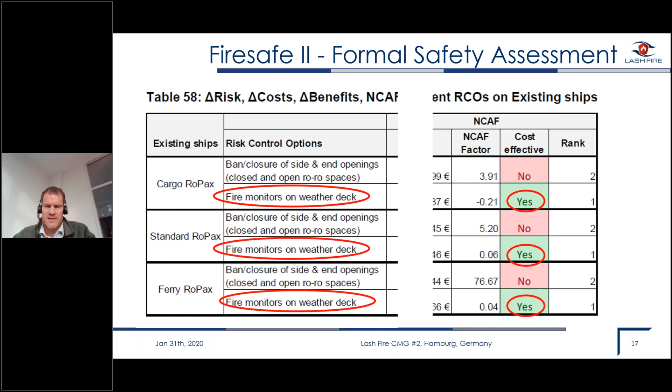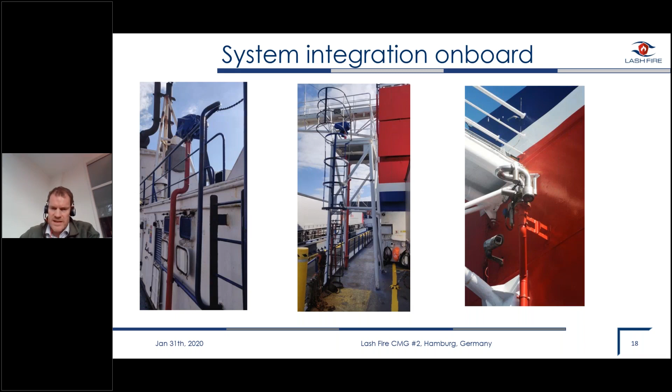We could also go for the remotely operated monitors, where there is more freedom to put them on existing structures where there is no operational manual access needed. Other considerations that need to be done is to look at the coverage, and there will be, let's say, formulas on how to calculate this coming as well to our support. I think John later on will tell more about what is coming in terms of rules here.

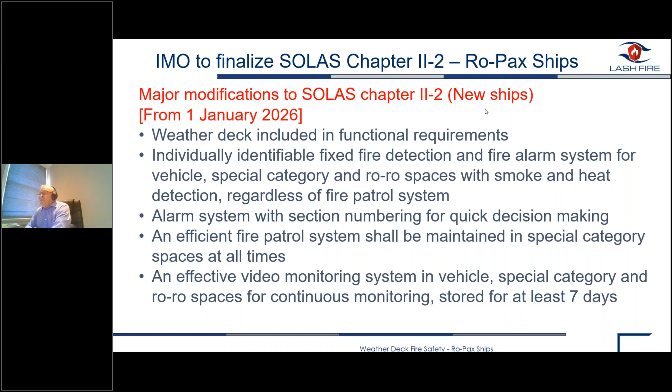So first we look at the major modifications for new ships, which in square brackets is proposed to come in from 1st of January 2026. So there are weather deck. The weather deck will be included in functional requirements for new ships. There will be individually identifiable fixed fire detection and fire alarm systems for ro-ro spaces, and fire patrol system in special category spaces at all times.

There will also be a video monitoring system in vehicle, special category and ro-ro spaces, with continuous monitoring to be stored for 7 days.

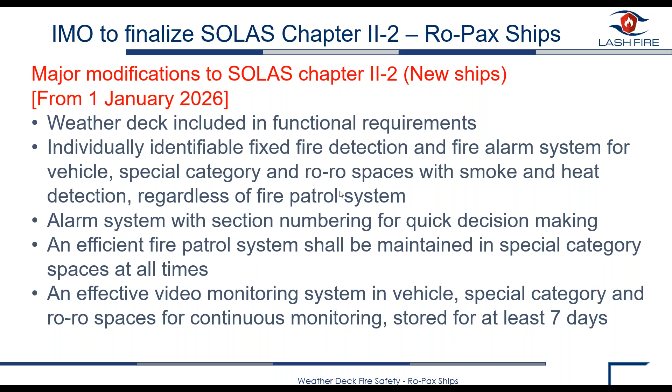John, we seem to have some technical issues with your presentation. Yes, that looks good now. Yes, I'm sorry. I think we are good now. So that was the first slide. I'll just move to the second slide. Is that okay, Johan? You can see the second slide? That's okay. Please carry on.

Good, thank you. So again, this still relates to new ships, planned to come in from 1st of January 2026, with additional structural fire protection for special category spaces, if subdivided with internal decks, the mezzanine decks. Arrangements for openings in ro-ro and special category spaces were a point of great discussion. Those openings will be permitted if protected by a closing device, but they're not to be permitted under survival craft, emergency generator, and air intakes from the engine rooms.

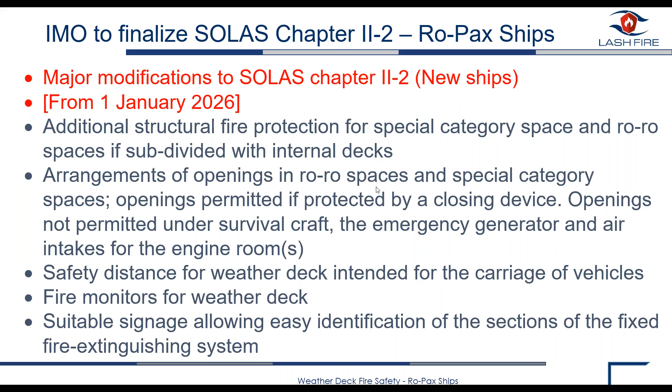There has been planning to work out a safety distance for weather decks intended for the carriage of vehicles, and fire monitors will be required for new ships on the weather deck, and suitable signage to give easy identification of the sections of the fixed fire extinguishing system will be required.

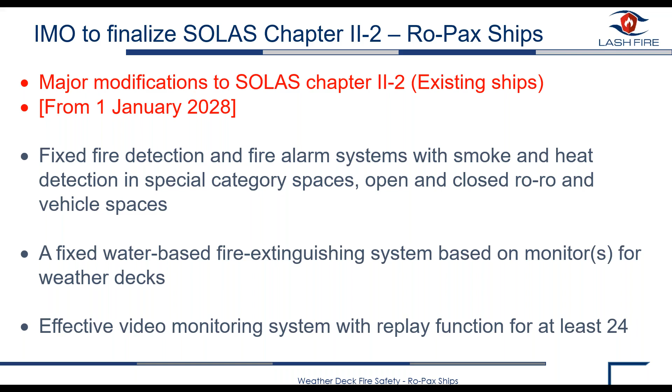If we now move to existing ships, the requirements are much less, and the plan here is, in square brackets, to implement from 1st of January 2028. And the things which will or are very likely to go forward are, again, the fixed fire detection and fire alarm systems with smoke and heat detection in special category, open and closed RoRo spaces and vehicle spaces, fixed fire monitors on the weather deck, and an effective video monitoring system, but with a replay function for at least 24 hours. Some ships may already have that installed, but only for a limited period. So it was agreed that would be for 24 hours on existing ships.

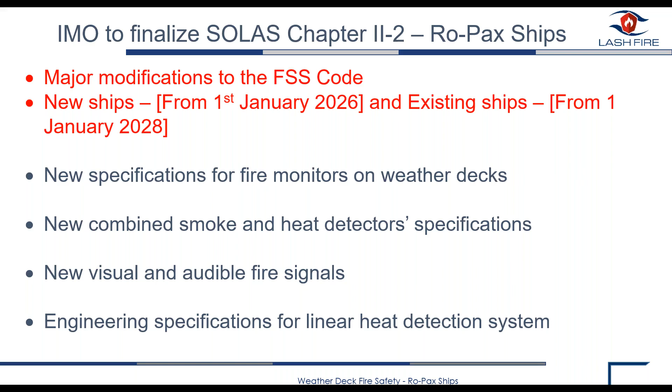There are consequential amendments to the FSS Code. For new ships, those amendments would be from 1st of January 2026, and existing ships from 1st of January 2028. So the dates are aligned. And the items here are specifications for fire monitors on weather decks, new combined smoke and heat detector specifications, new visual and audible fire signals, and engineering specifications for linear heat detection systems. And that concludes a summary of the upcoming IMO rule development.

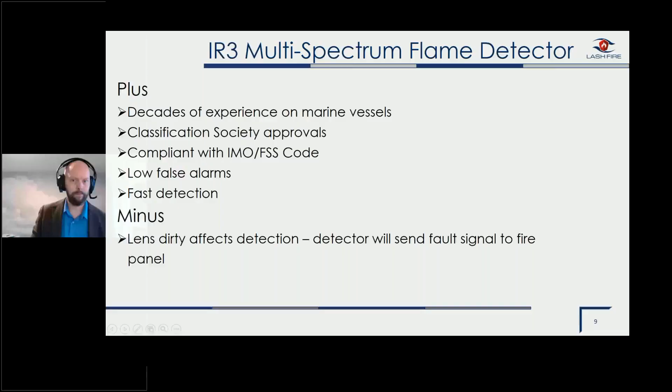Very good, Johan. Thank you so much for that. Now we have framed the issue and we have talked about the developments. So let's move into the solution side of things. Rick, East Coast, North America somewhere. Good morning. Houston. Let's hand over to you. Thank you, Johan. Rick Jeffress with Fike Corporation. You see my screen okay? Yes, we can see your screen, but we cannot see you, Rick. Okay, should be able to see me now. Excellent, thank you. All right, thank you.

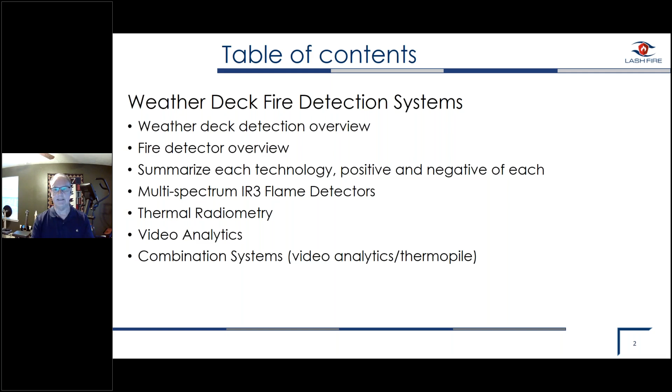So I'm Rick Jeffress. I'm with Fike Corporation. I handle business development for flame detectors, video analytics, and thermal radiometry. We'll be talking about these detection products on shipboard applications. So what we'll be talking about today is the weather deck detection overview. We'll talk about each type of technology. We'll provide the negatives and the positives of each technology. The technologies that we'll be discussing today are multi-spectrum triple IR flame detectors, thermal cameras, which are thermal radiometry, video analytics, and combination systems including video analytics and a thermopile element.

So the issues that we run into on weather decks are a large space. The detectors are required to cover a large area to reduce the amount of detectors required on the vessel. We also have the environment: rain, snow, water, ice. All the detectors are required to be able to withstand these elements, not corrode, continue to work. And if they do have an obstruction on the lens that alleviates their ability to detect, they need to be able to send a trouble signal to the fire alarm system so the crew can clean the detector.

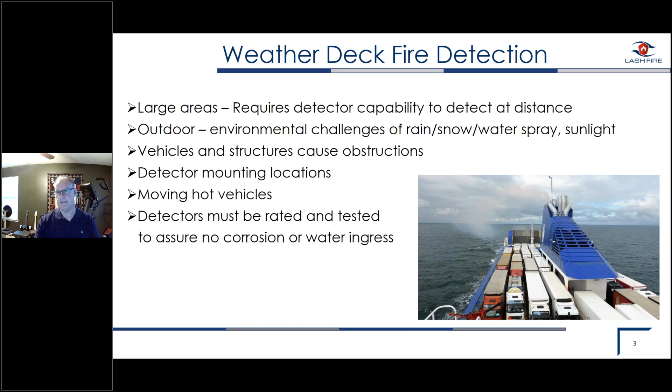We have vehicle obstructions. So as you can see in this image, any fire that occurs between the vehicles may not be detected by the detector. So we want to make sure the detectors are placed in such a manner that they have visibility to as much of the deck space between the vehicles as possible. So they should be mounted high. Moving hot vehicles, this is particularly troublesome for thermal radiometry. So that's an issue that we need to deal with. And the detectors need to be rugged and be able to withstand the environment without corrosion or water ingress.

All of the detectors that we tested have the ability to detect a 0.33 meter fire at 33 meters. So this is the requirement of EN 54, FM Global, and classification societies. And this is the standard of a 0.33 meter heptane fire at 33 meters. All the detectors that we tested have optional video cameras, and the cameras have the capability of ONVIF-S, which is a global communication standard for IP video cameras, so they can integrate with the existing NVR.

Only the triple IR flame detector technology has standards approved by class and included in the FSS Code. The IR3 flame detectors and the thermal radiometry cameras have technology that can integrate with water cannons for automatic operation, to point the water cannon at the fire when a fire is detected and flow the water. Cost differences between the technologies: thermal radiometry, due to the imager, has the highest cost. The combination video analytics thermopile is next lower. Then we have triple IR multispectrum flame detectors, and then video analytics.

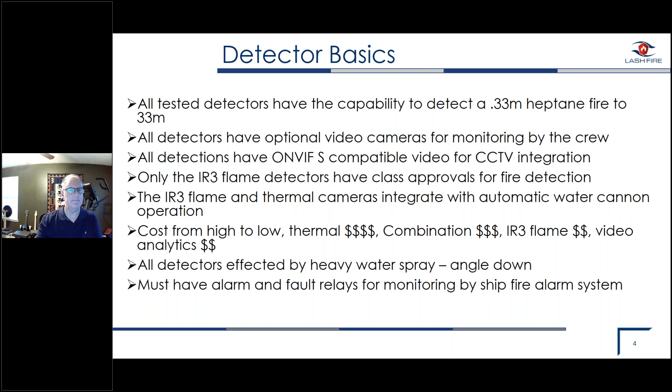All detectors will be affected by water spray, so we recommend that the detectors be angled downward to avoid buildup of water on the lenses. And each detector must have alarm and fault relays on board to make sure that they can be connected to the fire alarm system. So, as far as coverage is concerned, each blue quarter circle represents a detector's coverage. So that would be a detector located above the vehicles as high as we can get them, so we can look down between the vehicles with a 33 meter coverage. It's recommended to have some overlap, so areas that might not be covered by one detector are covered by another one. The coverage is three-dimensional, so you normally have a 90-degree horizontal and a 75-degree vertical field of view.

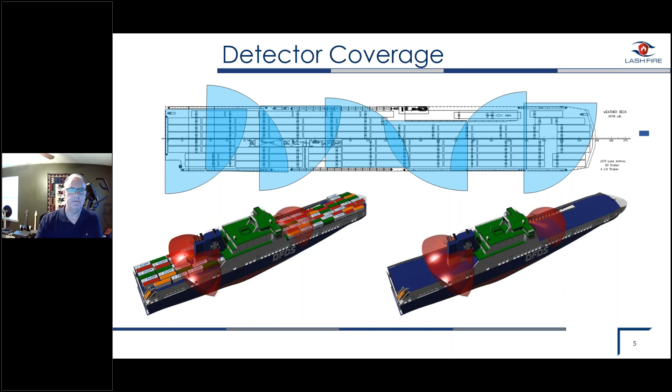The setup that we have now on the aft deck of a RoRo ship: we have the detectors mounted, monitoring the aft deck, monitoring the ship's operations to assure that we don't have false alarms, monitoring the detectors for false alarms, and then we have run some testing. We've got some more testing coming up for the detectors.

So triple IR multi-spectrum flame detectors have been used in the marine market, oil and gas market for years. They do comply with the FSS code. All classification societies have multi-spectrum infrared standards and approvals. EN54 has standards, FM Global in the US as well. So these are widely used on refineries near the ocean, on offshore oil and gas platforms, FPSOs.

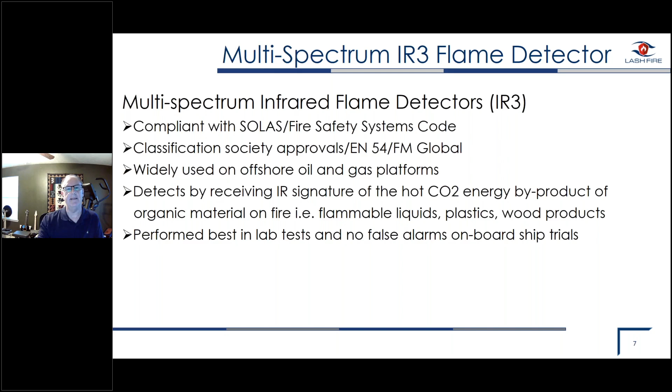So the way that triple IR flame detectors work, they're monitoring for the IR signature from hot CO2 that is a byproduct of an organic fueled flame. This technology was the fastest to detect in the lab tests. So the way that the system works, as you can see in the top image, the top is a Fike, the bottom is a Tycho.

They work very similar in the fact that they are monitoring for the 4.5 micron spectrum. There are 3 ports. The 4 and the 5 microns are reference bands. If we see a high incidence of 4.5 and low of 4 and 5, then it is likely a flame. But if we see a high signature of all the frequencies, then it's likely noise. So that's basically how a triple IR flame detector works. There's more in the algorithms based on the manufacturer.

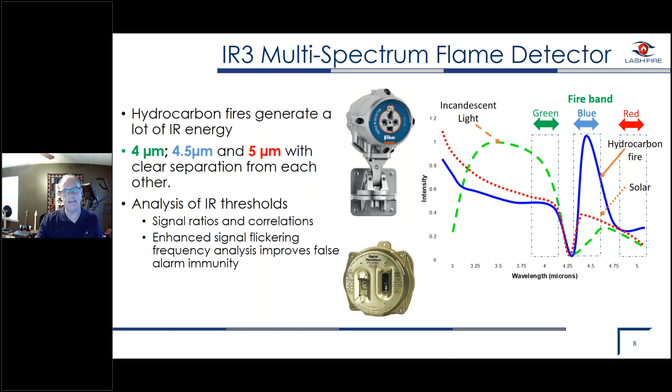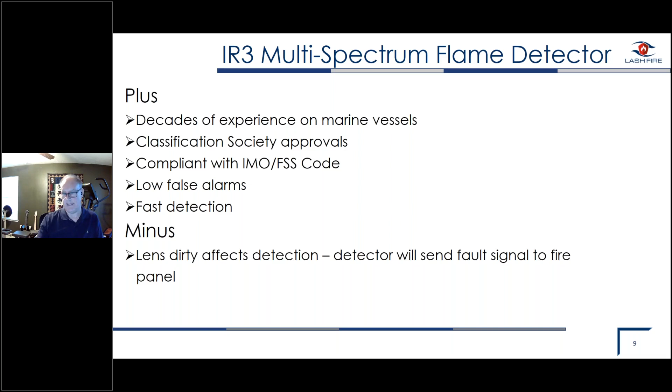So pluses of triple IR multi-spectrum flame detectors. They've been used for decades on marine vessels, primarily in the oil and gas industry. There are approvals in place. They're compliant with FSS. Low to no false alarms. There's no reason why this technology should have any false alarms in the environment. Very fast detection as well. Minus, as with any of the detectors, if the lens gets dirty, that would inhibit the detection. The detector should send a signal to the fire alarm panel if its lens is obstructed.

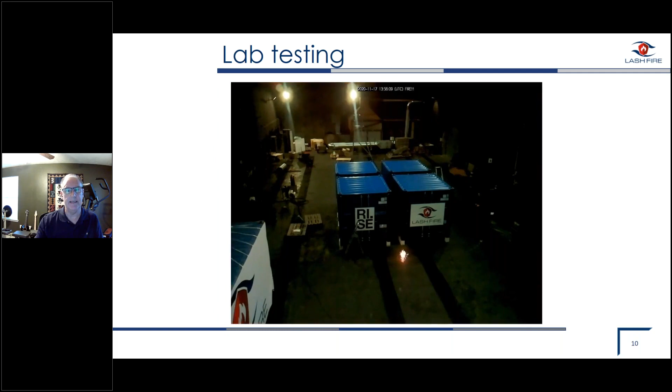This is a video from the lab fire. So you see the detector went into an alarm very quickly, and the flashing outline indicates an alarm situation. Same situation on the aft deck, a gentleman holding a stick with a rag on fire. Same flashing indicating the alarm.

So the thermal radiometry cameras monitor the outside surface of objects in the camera's field of view. They have been proven to detect at very great distances. A lot of potential for this technology to be used in the fire service, both on land and in the marine environment. There are few approval standards now, and this technology is just beginning to be used for the fire service, but we're seeing a lot of good results from the technology.

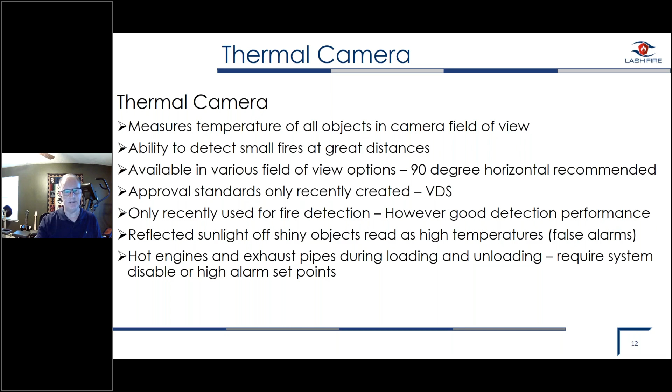One of the issues that we run into is when you're loading and unloading, the hot engines are picked up as a high temperature on the thermal cameras. So we must set the alarm threshold above the hot exhaust pipes, or turn off the detectors during loading and unloading. The way that the technology works, we're monitoring a lower frequency than the triple IR. The energy is received on an imager and then processed for alarms, and video is displayed.

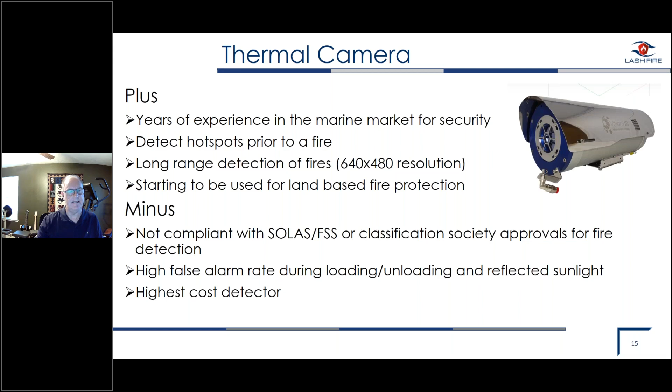So this technology has been used for years for security, monitoring for people, for vessels, on board ships. It will detect a hotspot prior to a flame, which a triple IR flame detector or a video analytics camera requires. Has long range capabilities, and we're starting to use it for fire detection. No FSS or other standards for this type. We do see some high false alarm rate during loading and unloading, so some tweaking of the technology needs to take place, and this is the highest cost detector.

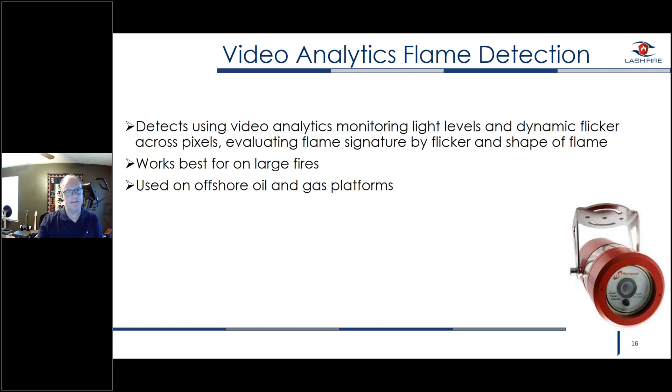Video analytics is monitoring light levels. Sometimes some technologies use color. We're looking for dynamic flicker and the movement of the flame, the shape of the flame. So this works best on large fires, especially at greater distances. And the detector needs to see most of the fire so we can see the flicker and the moving object. It is being used on oil and gas platforms currently. A video from our lab tests, the video analytics will indicate the area of the flame with a red box.

So pluses: the technology has been used in the marine market on oil and gas facilities outdoors and has proven to have a low false alarm rate. Minus: no EN 54 standards or other marine approved standards for this technology. FM Global in the US does have a standard for video analytics.

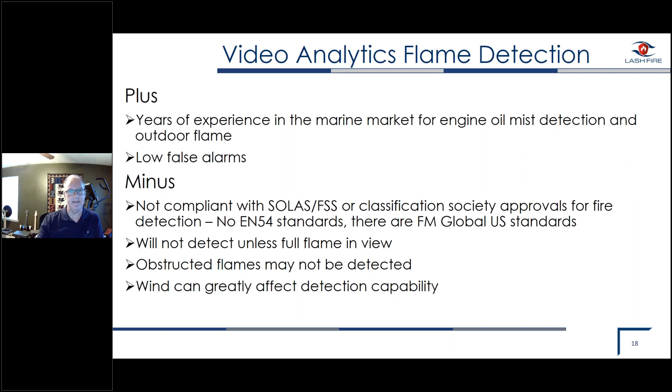Need to have the full flame in the detector's field of view. Obstructed flames likely will not be detected. You have to see the full flame. And wind can affect the flame and how it's perceived by the technology.

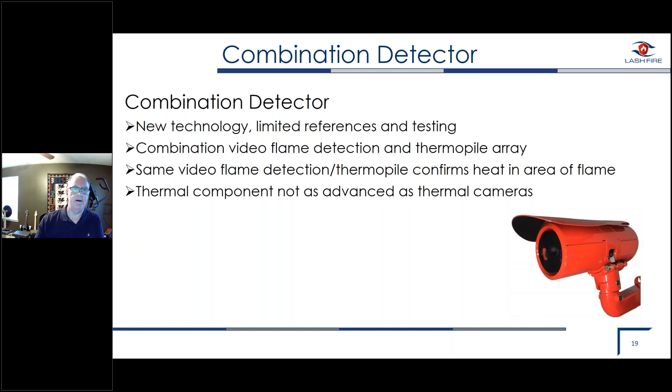The combination detector is video analytics with a thermopile. It's not as advanced thermal radiometry as a thermal camera, but it will tell you if there is heat in the area of the detection. So we're combining: if the video analytics sees a flame and it's confirmed by heat in that area, then an alarm is generated. There are no standards for this technology.

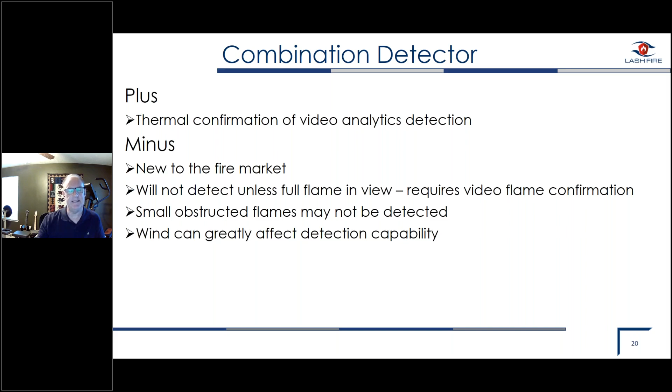This is new to the market. It shows promise. We're doing some testing. It has detected. We have seen some false alarms with it. But with video analytics, the wind can have an effect, and small flames will not be detected, where they likely would be detected by thermal cameras or the triple IR flame detectors.

So based on the testing on the ship so far, the thermal radiometry cameras have been challenged as we expected them to be due to the loading and unloading on the vessels. The combination as well, we are seeing some false alarms. Video analytics can be affected by sunlight, flicker with water on the deck, and then if there is some heat in the area, that can cause a false alarm. The triple IR flame detectors and the video analytics have had no false alarms to date. So thank you for your time.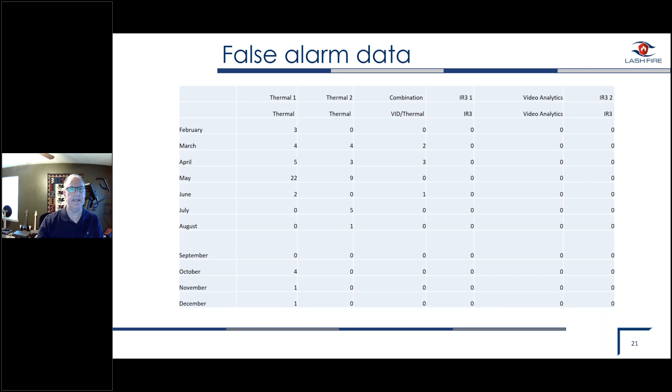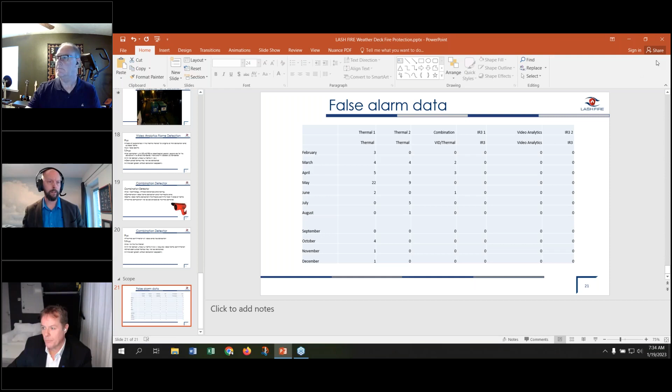Many thanks, Rick. I recall early days at the IMO when we had deliberations on these things, and there were a lot of concerns that the detection systems just weren't there. But I think the industry has caught up, and there seems to be quite a lot to choose from. Moving from detection, the final part of our general discussion here is on the suppression side. So Roger, how would you recommend we deal with this in case we have a fire on the weather deck?

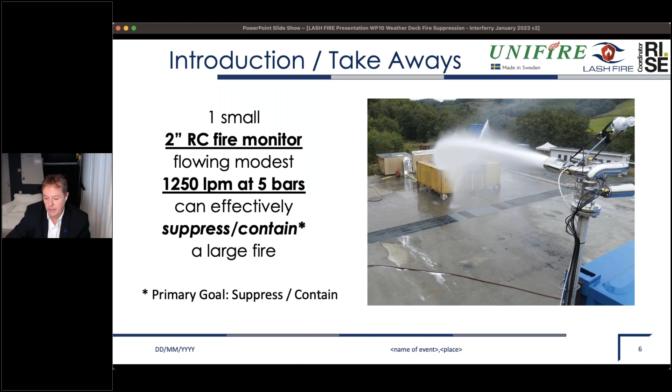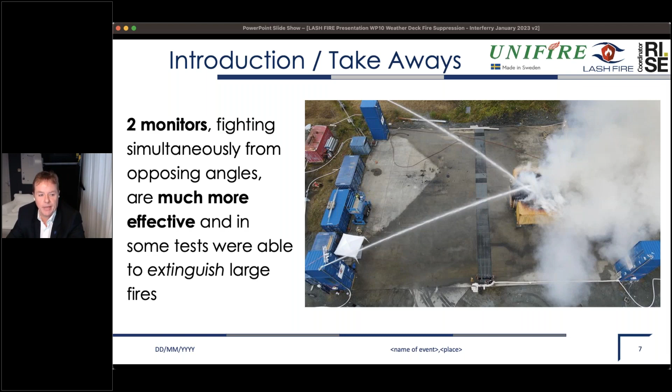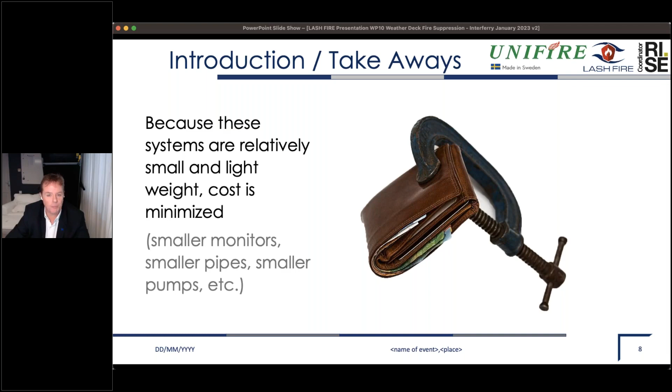Also, 2 fire monitors fighting simultaneously from opposing angles is much more effective, and in some tests we were even able to extinguish large fires. Next, because the systems are relatively small, using a 2-inch monitor at relatively low flows and pressures, we're able to reduce the costs. Smaller pipes are required, smaller pumps, and so on. So that keeps costs under control.

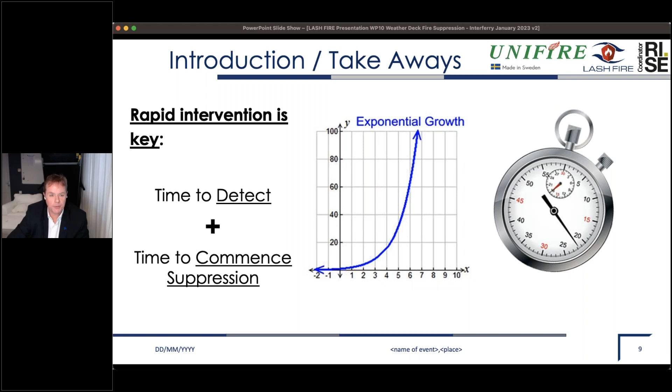Next, rapid intervention is really key. So we want to minimize the time to detect and then commence suppression as much as possible. Also, autonomous systems can very rapidly detect a fire, locate the fire, and suppress it with the fire monitors. This brings a big advantage to be able to react very quickly to a fire on the weather deck.

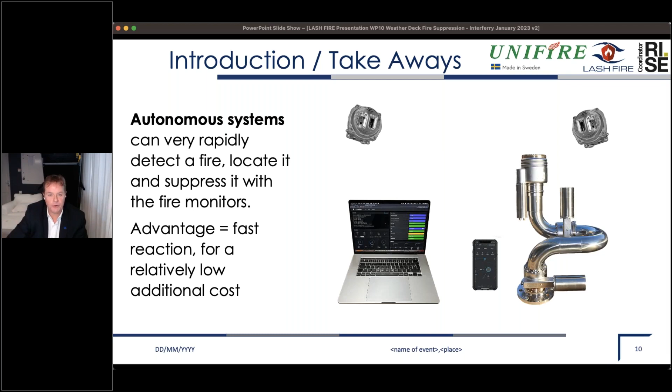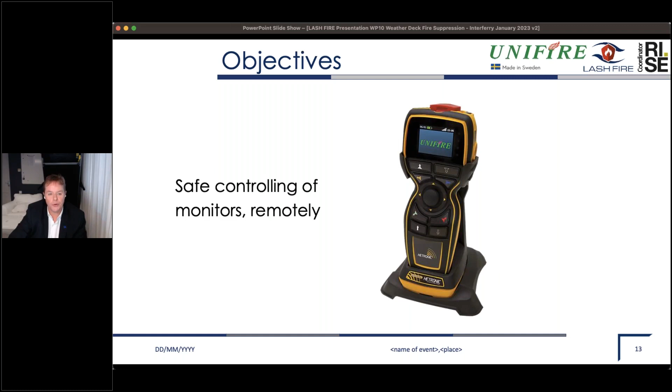So the objectives that we looked at were, first of all, quick system activation and suppression. Then also the safe controlling of the monitors by remote control. Next, high coverage of the deck. And then all of the equipment needs to be able to withstand the harsh environment. We also want to minimize cost to the maximum extent possible. And we also want to bring in state-of-the-art technologies to help with the problem.

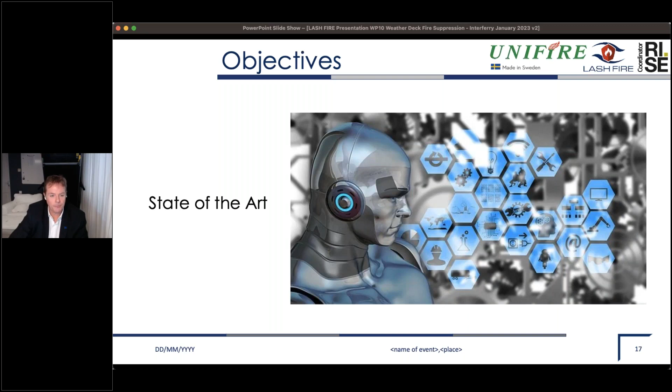So the solutions that we came to and developed and tested were fire monitors, so remote controlled, also looking at semi-autonomous and fully autonomous remote control systems. And then another partner developed a compressed air foam system, which unfortunately malfunctioned during the testing, so we don't have any conclusions from that. And for that reason, I won't talk about that in the rest of the presentation.

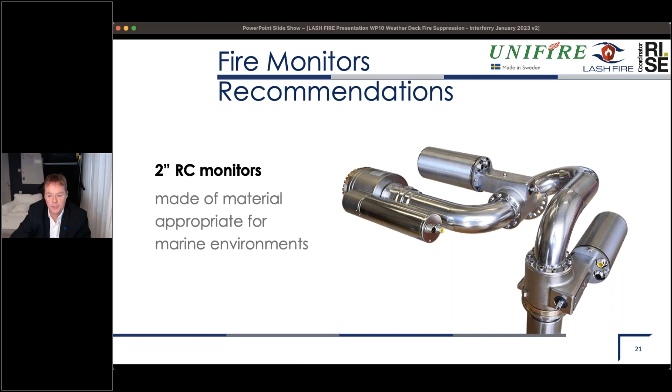So looking at the fire monitors, we are recommending 2-inch remote controlled monitors. They should be made, obviously, of a material that's appropriate for marine environments, such as stainless steel 316L or other equivalent. We are recommending a modest flow of 1,250 liters a minute at 5 bars of pressure. And again, that's to keep all of the system requirements down to a minimum while still being able to provide effective suppression.

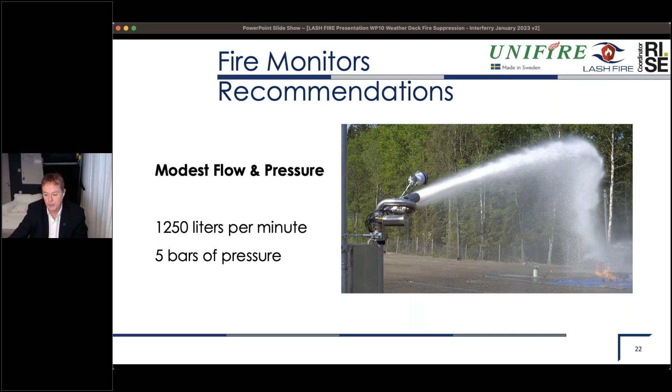Not the anticipated IMO language that was introduced at the beginning of the talk, but from our research and development, what we're recommending to the IMO through the LASH FIRE project is that the monitors all be able to be remote controlled. And there's a number of reasons for that. First of all, by having them remote controlled, you allow the maximum flexibility in terms of placement, to put them up high and in locations where they can adequately suppress a fire on the weather deck, especially given the very tight packing of the cargo.

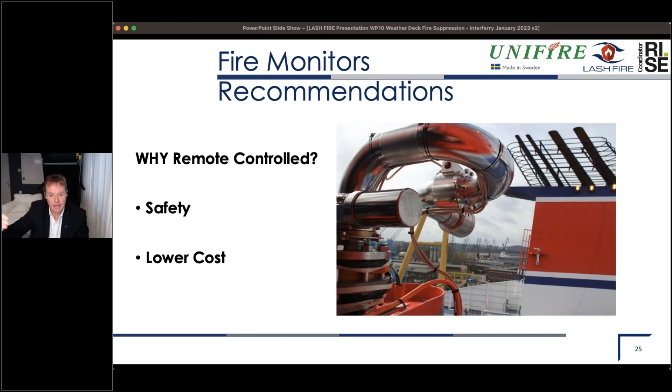Also, you can have a faster response. A human can pick up the remote control and immediately start suppressing, rather than having to get to a mechanically operated monitor, very often having to get dressed and get an air supply and so on, which dramatically reduces the response time. Also, from a safety perspective, you can keep a safe distance away from the fire and still be able to operate it. And by not requiring these structures to get up to a manually operated monitor, and for the other reasons, we're able to lower the overall cost.

So we're recommending that all systems be remote controlled, but we have also looked at and developed and allowed for semi-autonomous systems, which allow a human to start the system and record and play back a spray pattern while they continue on to other suppression activities or help with other emergencies. Also, fully autonomous systems that require no human intervention whatsoever, which can automatically and very quickly detect a fire and suppress it.

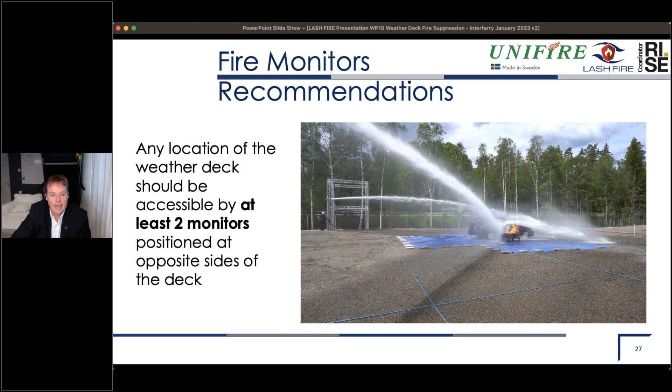We also are recommending that all locations of the deck be accessible by at least 2 monitors positioned at opposite sides of the deck, and that the fire pump be able to supply at least 2 monitors simultaneously. Also, the monitors should be placed high up in order to give them the ability to properly suppress the cargo, including in the middle. As you know, the decks get very packed, and you need to get them up above to have any sort of an angle of attack to suppress them.

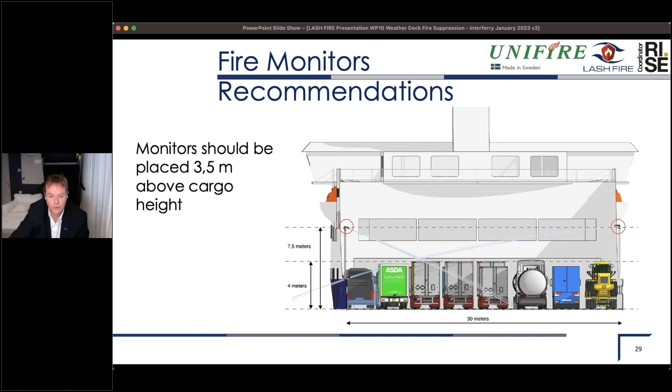So now I'll go through some of the tests that we did. Essentially, we did a large-scale fire test to see the effectiveness of the suppression with water. And we did different combinations. So we did them with 1 monitor at a time, with a 30-second pre-burn to simulate a rapid autonomous response. And then we also did a pre-burn of 300 seconds, or 5 minutes, to simulate a human intervention with a 5-minute delay, and see how the monitors were able to suppress a fire under those conditions.

So we did that with 1 monitor, and then we also did it with 2 monitors at different angles, and again with different delay times. And then in a separate set of tests, we looked at validating an autonomous system to see if it could detect and aim, and I'll get into that also. So the setup was really to mimic a freight truck on a weather deck sandwiched between 2, in this case, containers, to simulate 2 other freight trucks.

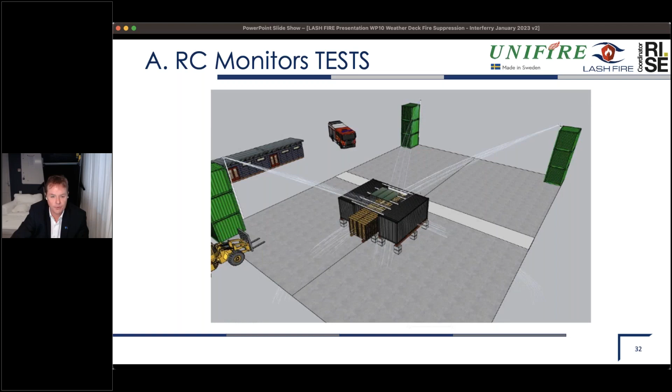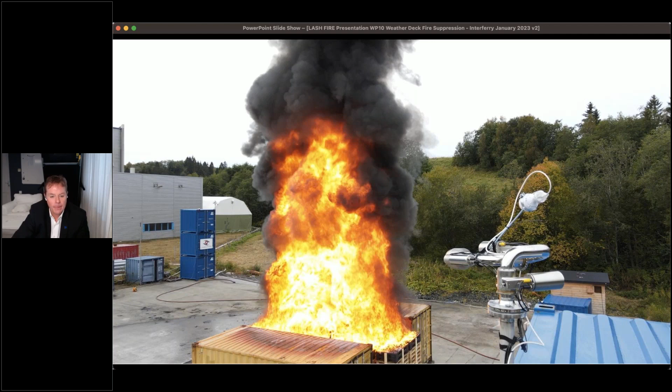So now I'll show you a few pictures of 1 monitor, and in conclusion, 1 monitor in all of the tests was able to effectively suppress and contain the fire, which is our primary goal. And you can see the pre-burn times, the 300 seconds especially, led to absolutely massive fires. Very, very interesting results and very effective suppression.

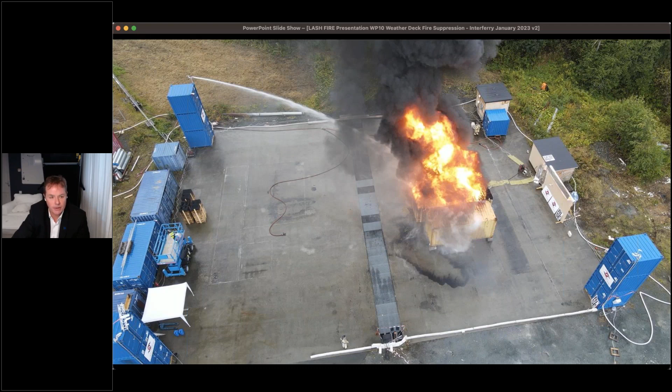Just some more images of the single test, single monitor. And then here's several images of the 2 monitors. And in conclusion, with 2 monitors, we saw far superior suppression, much more rapid cooling, and just an overall much better response.

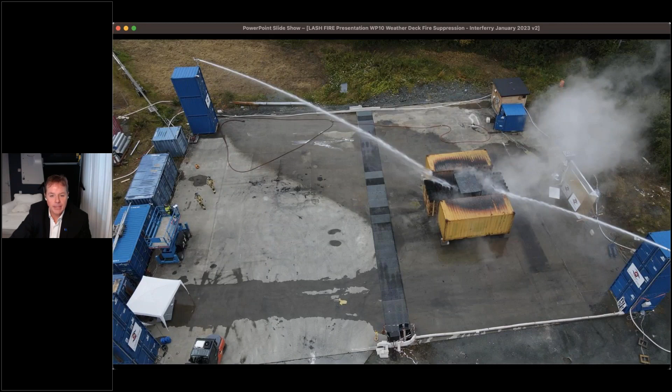And in fact, several of the tests with the 2 monitors were able to actually extinguish a very large 300-second pre-burn test very quickly. So very, very effective with 2 monitors. Again, to summarize, 1 monitor is successful, able to suppress a fire, but not able to extinguish them. Still, that's a success in terms of what we're after.

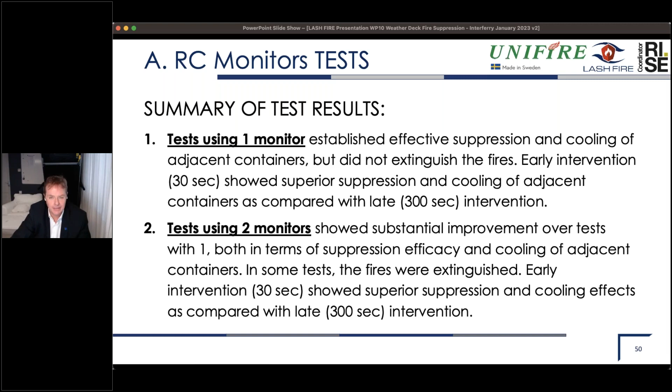Early intervention was much better than later intervention. So the sooner you can get to it, the better. Also, tests using the 2 monitors were superior to all of the tests using 1 monitor. And again, the early intervention, 30 seconds, was much better than 300 seconds.

Now, turning to fully autonomous systems, Unifire developed the FlameRanger system, a fully autonomous system that is essentially combining the fire detection with the aiming of the water monitor by means of using advanced electronic hardware and software. And the technology is really coming a long way on the market, and these systems are now becoming more and more ubiquitous and more and more advanced.

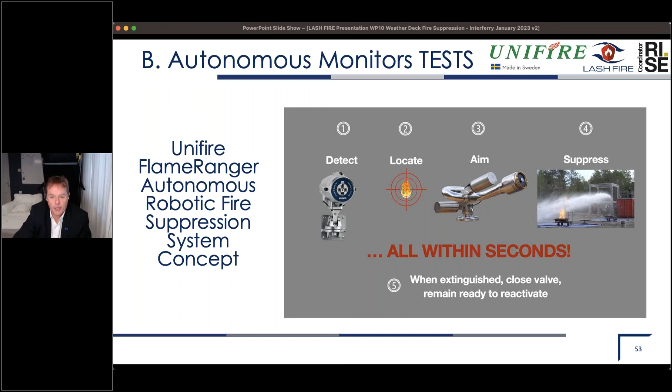The basic idea is you bring in signals from a fire detection technology, and various technologies can be used, including the ones that Rick Jeffress mentioned earlier. So you want to detect, you want to be able to locate that fire, you need to know where it is. You then want to aim the fire monitor autonomously and suppress that fire all within seconds.

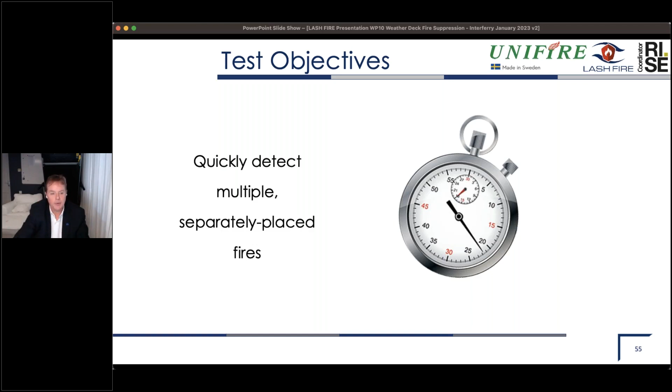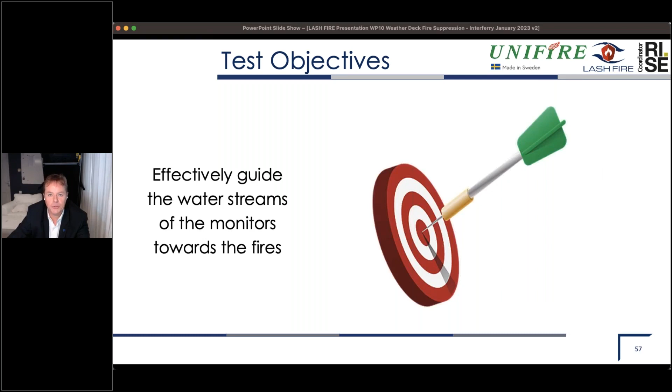So that's what the objective of these tests was, to see if an autonomous system on a mimicked weather deck is able to quickly detect multiple separately placed fires, able to determine the 3-dimensional position of the fires, and able to accurately guide the water stream to those fires.

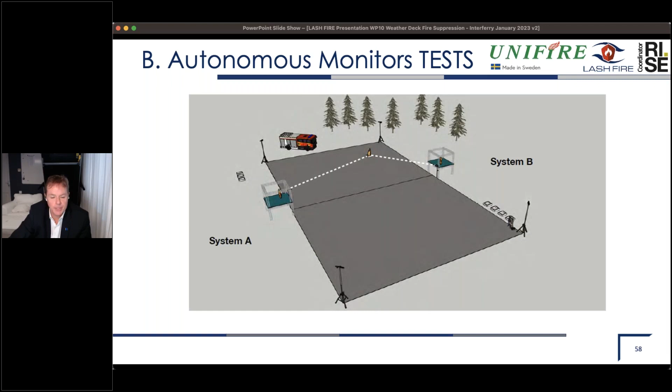So the setup was a 30 by 50 meter area, again, mimicking a weather deck. We had 2 systems set up on opposite sides, and each system had 2 flame detectors in order to be able to locate the fires in 3-dimensional space. And then fires were placed at different areas on the grid, and a number of tests were conducted. This is what the monitor and the detectors looked like.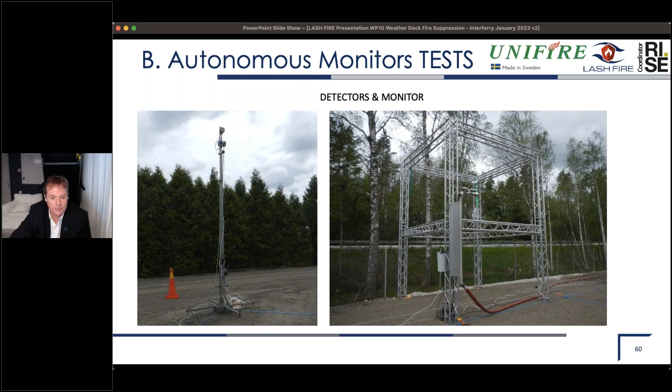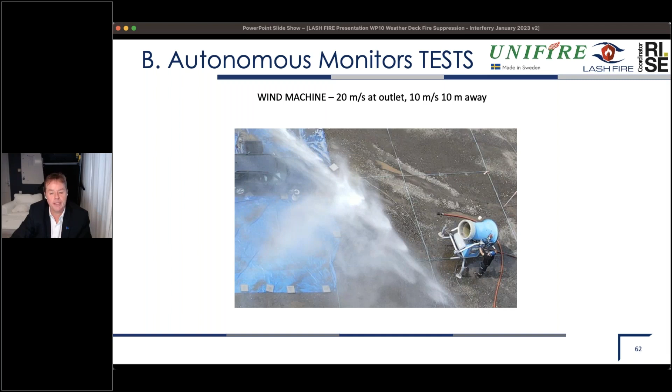We used remote-controlled gas burners to simulate the fires and be able to turn them on and off in different locations. And there was also a wind machine to simulate wind, and rain and fog, to see the effects on both the suppression and also the detection.

So again, fire detection testing to see the time and detection accuracy. Then also the precision of the ability to aim the monitors and accurately move from one fire to the next. And then also to test the operation of 2 independent systems simultaneously, and then to look at the influence of wind on the water stream and also the influence of rain and fog on the fire detection.

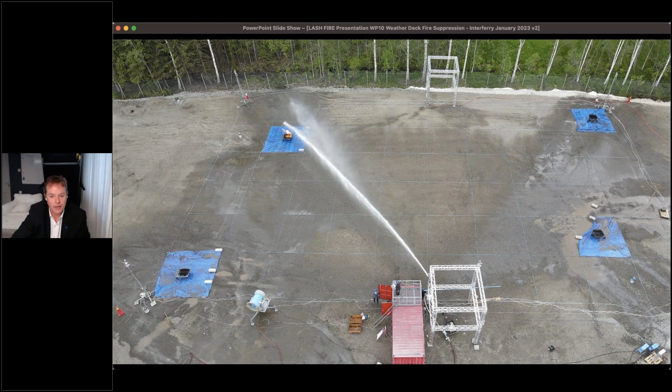And this is what the actual test looked like. And again, we have video of that that we can share with you if you're interested. Very, very interesting tests and how the system was able to move from one to the next. Here's the wind machine and what that simulation looked like.

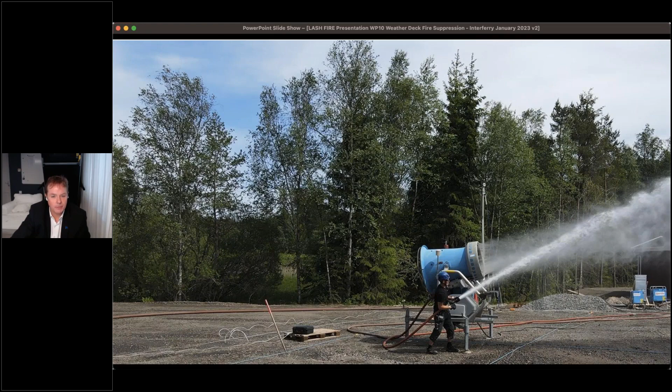And the results were as follows. So in all of the tests, in all fire positions, the system was able to detect in under 10 seconds. The fire detection was not affected by the simulated rain or fog. The system did accurately find the 3-dimensional size and position of every fire. The system accurately aimed the water streams of the monitors to the fire's locations.

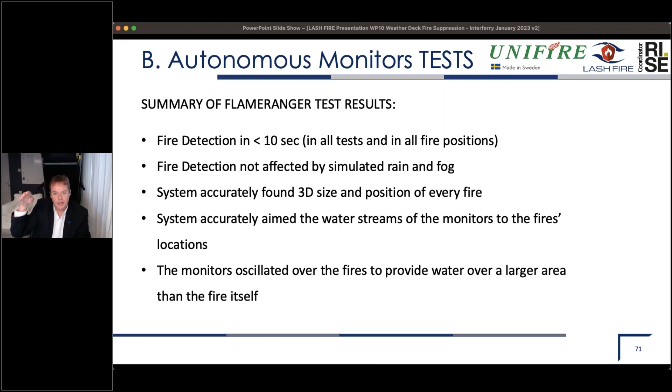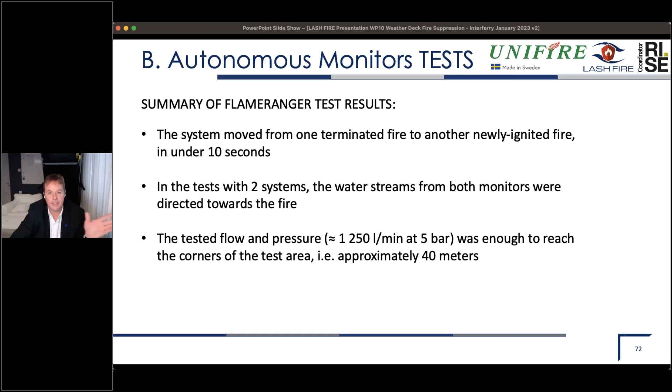The monitors oscillated over the fires to provide water over a larger area than the fire itself using intelligence. The system moved from one terminated fire to another newly ignited fire in under 10 seconds. The test with 2 systems showed that both systems were able to hit the fires, and that the flow of 1,250 liters a minute at 5 bars of pressure was enough to get to the very corners of the test area, roughly 40-meter reach.

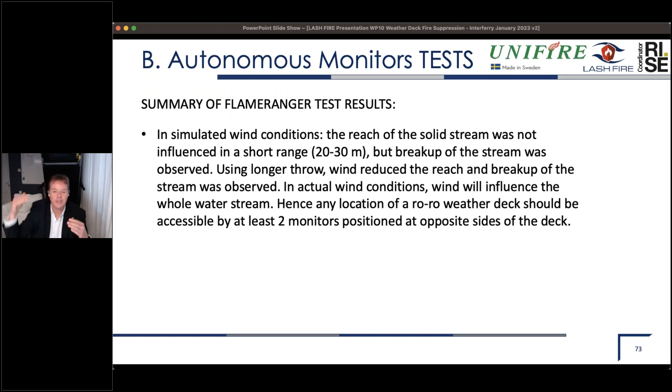And then last, wind will affect. In relatively short distances, it didn't affect it too much, but in actual conditions, the wind will affect the stream, especially the farther away it is, and therefore, by having two monitors covering all positions, you're not only getting much better suppression, but also maximizing the chance of being able to suppress that fire even in high winds. If wind's affecting one, the other one should still be able to hit it.

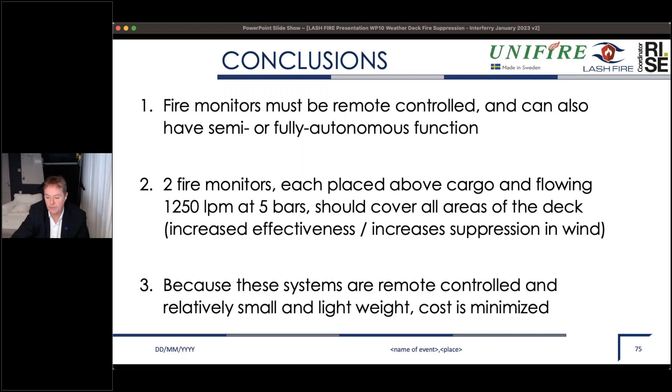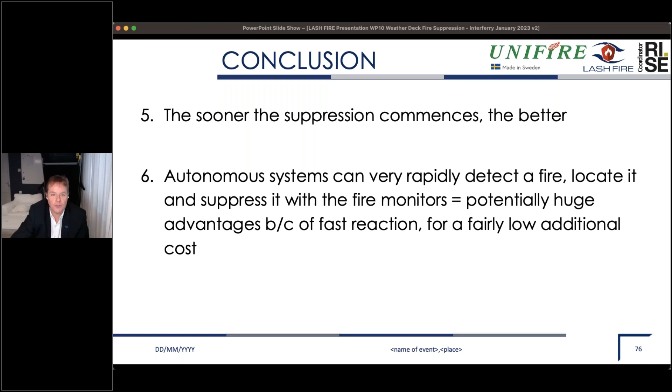So just to conclude, they should be remote controlled. Two monitors should be able to cover the whole deck at relatively modest flows and pressures. Costs are reduced by having them remote controlled and relatively small. The faster we commence suppression, the better. And autonomous systems are now available that can rapidly and autonomously detect a fire and suppress it, which gives big advantages in terms of getting to that fire rapidly for a relatively low additional cost.